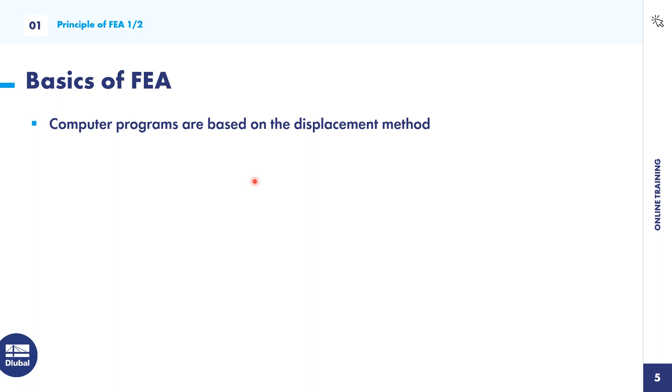But computer programs use the displacement method because it's easier to implement, more convenient, and easier for calculation in the programs. So if you look at any complex structures, it's normal that the analytical solution is not so easy.

It's hardly possible to calculate or find any analytical solution. This is also the reason why real structures are decomposed into a mesh of finite, interconnected elements. At each element continuum and at each node, the properties, especially the degrees of freedom like deformation or restraints, are described.

Normally, finite element analysis is just a numerical approximation of an exact solution, so the mechanical behavior is described by approximation sets. The whole process of decomposing a structure into finite elements is called discretization. Remember that, this is very important: discretization is the decomposition of a structure into finite elements.

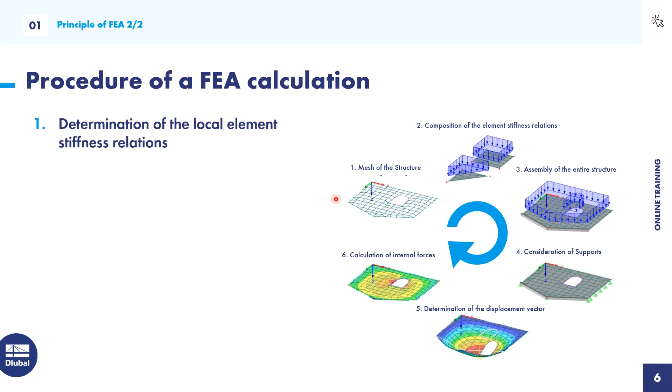So what is the general procedure of an FEA calculation? On the right side you can see this image with the basic steps. First of all, what we do is the discretization: we determine the local stiffness relations, the local element stiffness matrix at each node. So we mesh the structure, do the discretization, then transform it to the global coordinate system and assemble the entire structure.

Then we also have to consider different supports so that the structure is stable. The boundary conditions are very important to define, and normally the boundary conditions are the support conditions.

As we said before, the displacement method is implemented in the computer programs. First we determine the displacement vector, and after that the internal forces like bending moment, shear forces, normal forces, tensions, stresses, strains, and so on. This is also called the solution of the equation system, and then we determine the support forces and internal forces. So this is the general and very short concept of FEA calculation.

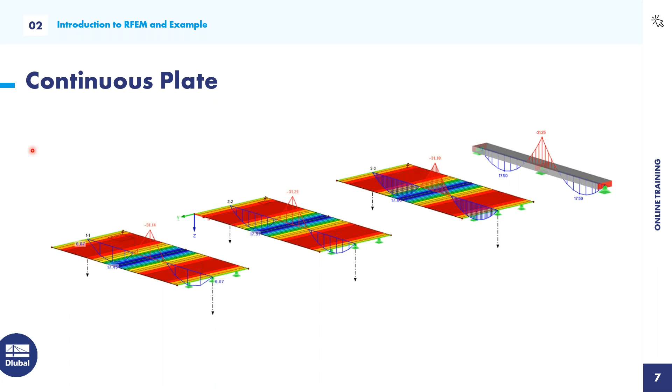I have also prepared one question for you because I want to know how good your knowledge is in using RFEM.

Okay, most of you have finished this poll, so I will show you the results. Most of you, the participants today, are beginners, perfect, and also some other guys already have some experience using RFEM, also fine, because even for them you can learn maybe some functions you haven't heard about before. So I think for everybody there's something new to learn here in RFEM. Let's go ahead.

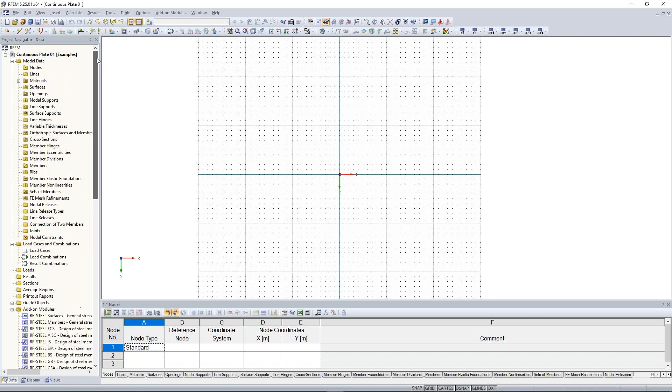I will now explain the whole user interface of RFEM. You don't have to do it with me now, because I will open another project where I can explain the whole user interface using an already existing project. Just watch and note some information. So I will open this one.

Very good. I will activate the snap and grid function here in the status bar. The chronological step is that we have the menu bar, and here we have the possibility to do almost every kind of workflow function of RFEM.

In the basic file menu, you can save, open, import, export, insert blocks, save it in the project manager, print, and so on. I think this is known from other software applications.

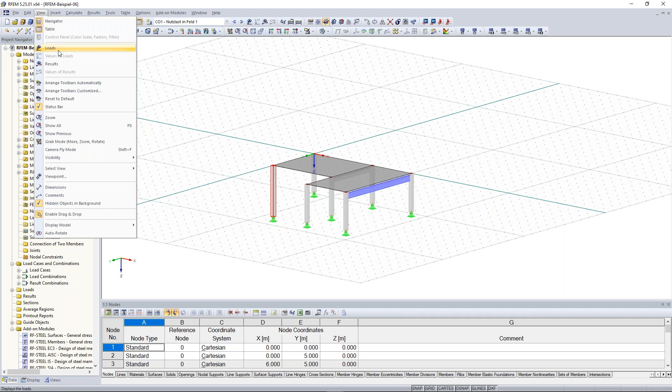Also, you find additional information concerning the model data, loads, load cases, and combinations. In the view, you can click on loads and the loads will appear.

Clicking on results, since we don't have any results at the moment, the program asks if I want to have the results, and I click yes. Now I see the results, and also some other kinds of things like comments, dimensions, and so on.

With this insert tab, you can insert almost every object, from model data to loads and also load cases and combinations.

The general step in RFEM is that at first you model all kinds of necessary objects. So you define materials, cross sections, and then you can also model members, hinges, and finally nodal supports. Then you create load cases and combinations, then loads, and then you can calculate it, and you have the possibility to watch the internal forces and results. This is the basic step in RFEM for calculating projects or doing structural analysis.

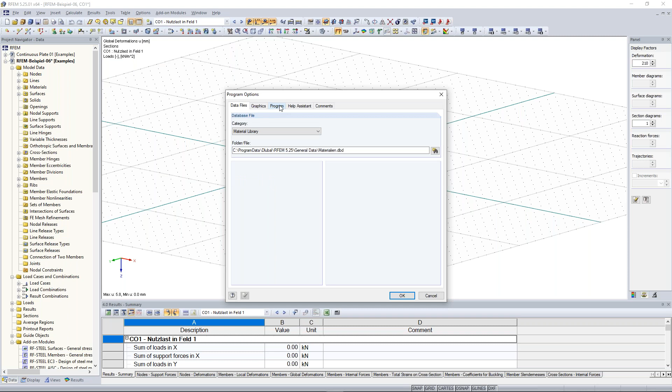The options in the menu bar let you change the language, especially for those from Italy, France, Spain, or similar countries. We have the possibility to change the language into, I think, 10 or 11 languages. The whole interface will change after you quit and reopen the program, so you restart it. Italian, Polish, French - these kinds of languages we offer. Maybe you also see in the background I use a white background here.

For those opening RFEM for the first time, you can change your background. Here in the options, in the configuration manager, you can change the background to black or white. At the moment I use the white background, but when I double click on black background, it will change to black. You can also adjust a green or red background - just use the display properties and other colors, and you can adapt your background.

Good. I think this is everything for the menu bar. Under the menu bar we find the symbol bar.

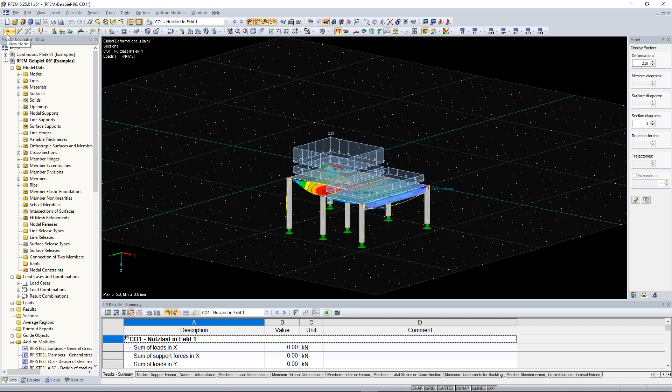The symbols enable you a fast way to insert some objects, or views, or edits, or something like that. So if I want to create a new node, I click on new node and click here somewhere, and I get new nodes and so on. The same also with lines, for example - I click here and then here. So this is, I think, pretty clear.

Now I will undo it, and I will also change my background again to a white background. Good.

Now on the left side you also find the project navigator. It is divided into four registers: data navigator, display navigator, view navigator, and also the results navigator.

So at the first one, the data navigator, you find all kinds of objects, beginning from model data, continuing to the load cases, the loads, results, and so on. You can create new objects, for example, by right-clicking on one node: edit node or new node. But of course, you can find all existing objects. So when I open this tree structure, I see the already created nodes, like this one.

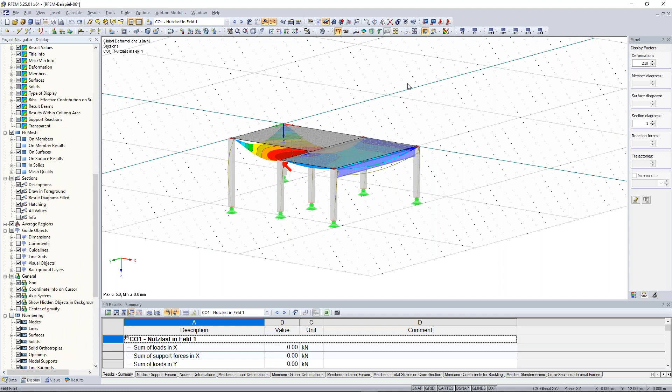You can also make some kinds of objects disappear, like the nodal supports. Just click on nodal supports and the supports disappear, but only in visibility. The same also applies to the results, FE mesh. So when I don't want to see the FE mesh at the moment, I click on that and you don't see it.

So far to the display navigator. Let's continue with the view navigator. So if you like a certain view, for example this one, quite nice, then you can create a user-defined view. Just click here on create new user-defined view, favorite.

When you rotate it a little bit, or move away from the model, and you want to have your favorite view again, just click here on favorite and it jumps back to your favorite view. This is a big advantage, especially when you are doing more detailed or complex structures or projects. Then you can use these user-defined views.

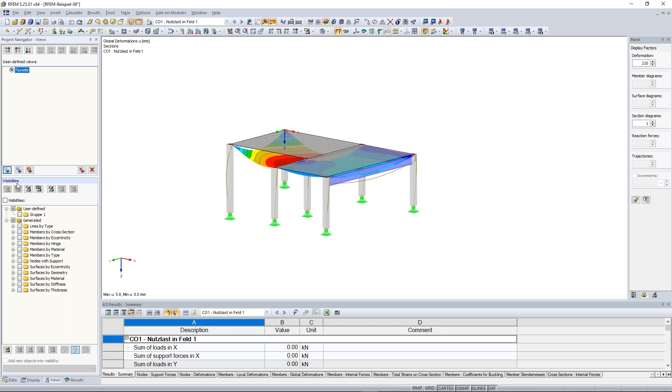Also with the help of visibilities, you can filter some things better. For example, I just want to see all cross sections of this concrete. No problem: go to members by cross section, open this tree, and activate the rectangle 300 by 300. Now only these kinds of cross sections are visible and also possible to modify.

You can also right-click, and this menu appears, and then you can click here on show hidden objects in the background, so the surfaces here will disappear and it will look like that.

To undo this visibility mode, you can click here, visibility by selected objects, click on the arrow, and then cancel visibility mode. The same thing you can also do here.

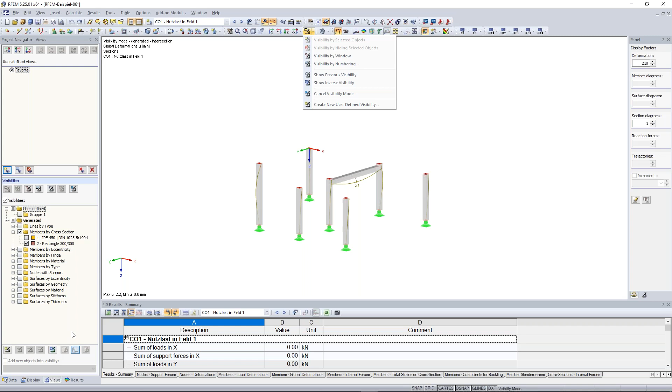Now the last navigator, this is the result navigator. Here I can see results like deformations, stresses, internal forces of members, and also the support reactions. At the moment I see the global deformation of the whole structure, also from the members and from the surfaces.

If I just want to look at the members, I click here on members and choose the right internal force. In this case, I choose the normal force, and there I can see the compression forces in the concrete columns.

Also here, internal forces of the surfaces, mx, my, and so on. And also the support reactions with the components px, py, pz, and so on.

So much for the navigator. Now, on the bottom of our user interface, we have also the tables.

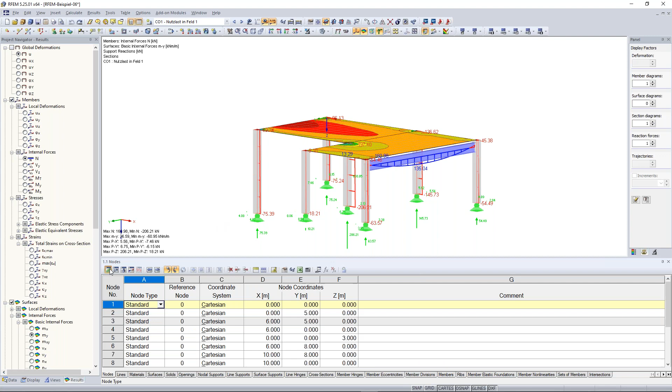With the tables, we have the possibility to view all information and also to insert and create new information or objects. For example, I can create a new node. So I click here on standard, reference node is my node here, and I enter the coordinates: x is 14, y is 0, and z is 3. And I see here this created node.

This is also possible for almost all other kinds of objects, like lines, materials, surfaces, solids, and so on. You can jump to the next tables by clicking the next icons. Now I am at the load cases, nodal loads, member loads, line loads, surface loads, results, and so on.

Now maybe to the movement of the RFEM model. With the middle mouse wheel, you can move your whole project.

By clicking the left mouse button, you can create a selection window. When you do it from the left corner to the right corner, you select everything which is completely inside this selection window. In this case, it would be the whole right column with the nodal support and also the node on the top.

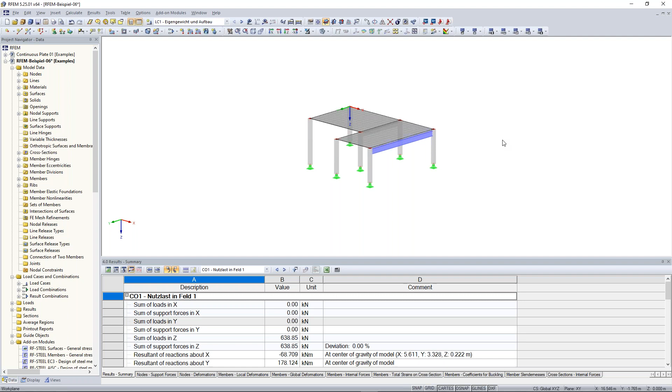With the mouse wheel, you can also zoom in and zoom out, I think this is clear. And when you press the control key on your keyboard and also press the mouse wheel, then you can rotate the structure. When you press the shift key and the mouse wheel, then you can zoom in and zoom out.

We offer these possibilities also with this icon here in the icon bar: move, zoom, rotate, and so on. There you have the same possibilities.

Good, I think this was everything. Bastian, have I forgotten something or do you want to add something? I think you haven't forgotten anything, and there are also no questions. So I think you can move on.

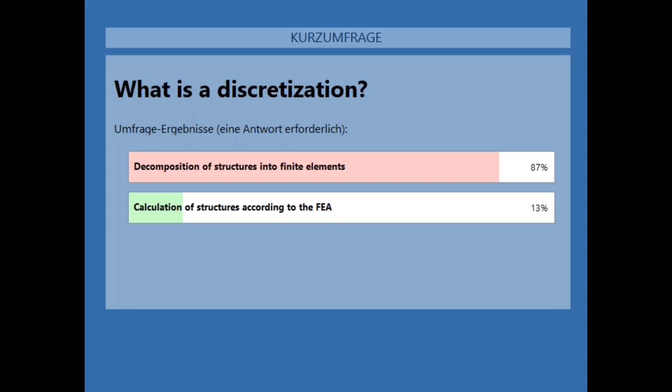Very, very good. So let's start our example. Jump back to the continuous plate. Let's start modeling it.

First of all, I create a new surface. In the symbol bar, I find this icon, new rectangular surface. By clicking on the arrow, I find also other kinds of surfaces, but for me it's good to use this rectangle one. I click on that and a new window opens.

The next thing I'm going to do is create the material. In this case, I use the Eurocode concrete C30/37 material. For those who don't have this material here, no problem - edit the material by clicking this icon here and open the material library.

There I have the possibility to filter different kinds of materials like concrete, metal, timber, and so on, and also the material category itself, like concrete and lightweight concrete, and define it according to the standard. In this case, I choose the Eurocode, because in Germany we use the Eurocode. Maybe when we have some people from Switzerland, China, Great Britain, Canada, and so on, there are also some other standards.

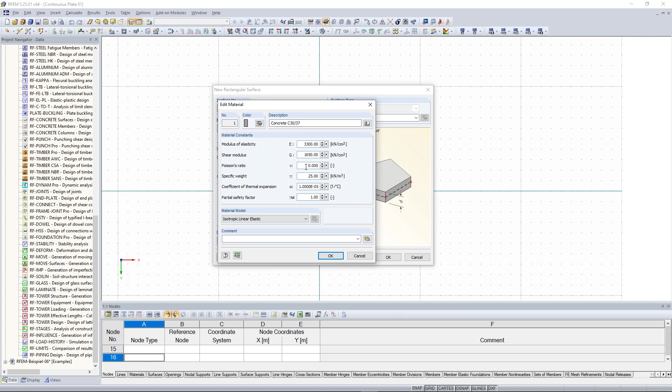for that example the results which should be constant over the whole plate thickness, so no shear deformation in the plate thickness. I click on OK. And the thickness of our concrete surface is 300 millimeters.

So I click on OK. And now I draw and activate here the snap function. Now I draw this rectangle from my local global coordinate system, 10 meters to the right side and 5 meters high.

Good, now I right click and close this way of inserting a new surface. So now I see here the rectangular surface, and now I can copy it or create a new one.

Now one tip, please remember this, it helps me a lot: by clicking the enter or return key on your keyboard, you do the same task again. So our task was the creation of this new rectangular surface. When I click the return key or enter key, it will open this new rectangular surface window again, and I click OK again, creating the same surface again with the same geometry.

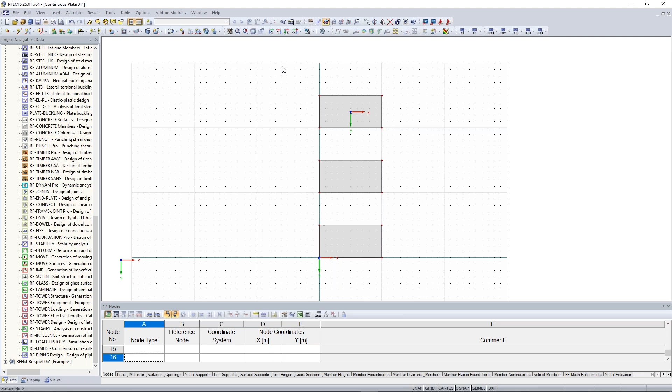And now I do it here again, in a distance of 5 meters from the right upper corner node. So now we move this 10 meters downwards. I select all 3 plates, snap here in the near of this middle surface, in the near of the left bottom corner, and move this to my global coordinate system.

Are the results better? It is useful to use the same thickness of the plate and also refer it on a 1 meter beam. So we create here a new cross section for member start, and I click here the import parametric solid cross section, a rectangle. The width of my cross section is 1000 millimeters, and the height is the same as the thickness of my plate, 300 millimeters. The material is the same, concrete C30/37.

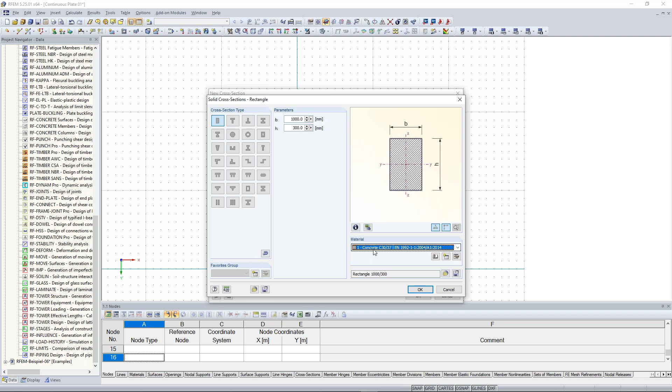I click on OK, and it looks like that. Here I get the cross-section description, also with the cross-section properties, like the moments of inertia, bending, torsion, and so on.

I click on OK. And now the member start has the cross-section of this one, and the member end also has the same. I click OK, and now I draw it from left to right, also 10 meters long, and close it with a right click.

Good. Now I can rotate it a little bit, and now I can see it from a 3D perspective.

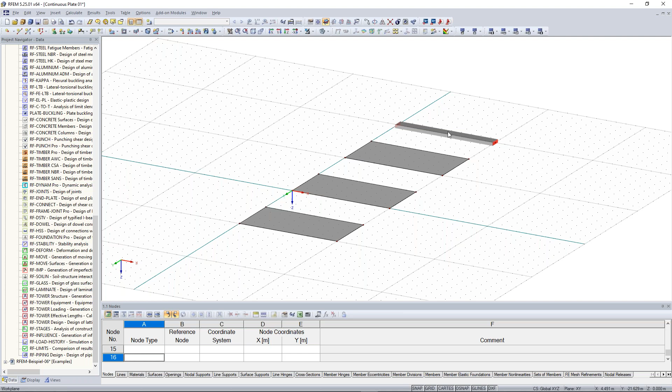So the next thing is we want to have a continuous beam and also continuous plate. Therefore, I have to create in the middle lines and also here nodes in order to create afterwards supports. So how can we do that? We can divide here this line into 2 lines, and then we get here the middle node. And then with the reference of the middle node, we can create the next line perpendicular to the other end.

So you can also see here the line, the red line, and also here the arrow. The arrow shows from the left to the right side, and this symbolizes that the starting node is on the left side and the end node on the right side.

With right click on one of the line nodes, I can also show the local axis system, and this is similar to the line direction. So the local x-axis of every line or every member is the same as in the line direction. So you see it shows to the right, to the same direction. And one important note is also that

every member has included a line, but not every line has included a member. So for this case, for example, I have here this member, and I have here included this line. So here I have this member and also the line, but not every line has a member. I think this is clear because here in this case I have this surface, and these lines are just the boundary lines for this surface.

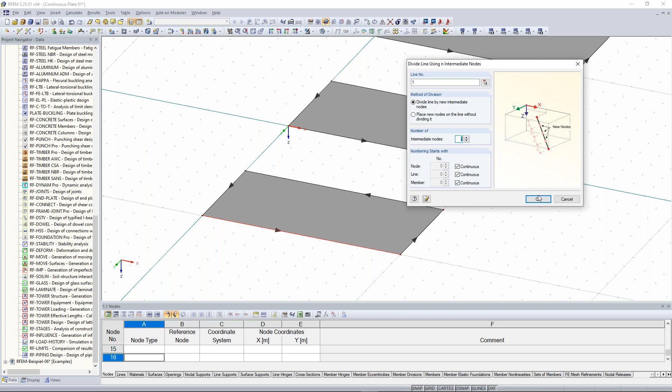And I just want to have a middle node, so I can divide it into n intermediate nodes. When I click here 1, it will be divided into 2 parts. When I enter here 2, into 3 parts, 3 into 4 parts, and so on. So I click here on 1, and I see here this node, and these 2 lines are divided.

Next thing is that we create here this line perpendicular to the next one. So click here on new line and draw this line from there to there, and double right click and we can close this.

Now it comes to my favorite way of creation of objects, and this is the copy via drag and drop. We can easily copy this line by drag and drop. Just click on that line, press the Control key on your keyboard, and now the left mouse, click and hold and put it to the other surface. And the same thing we do also for the other one.

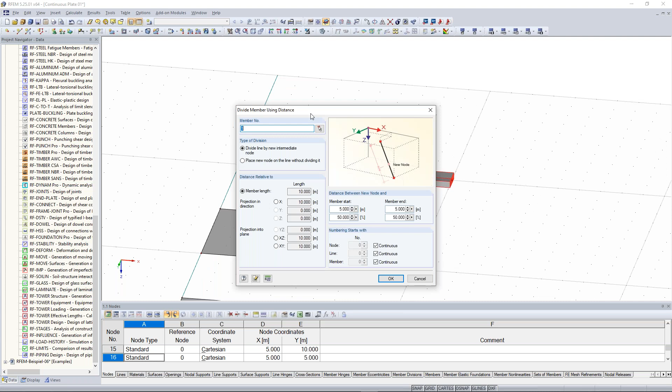Good. Now let's divide this member here. Press right click, divide member. Now you can do it by distance or graphically. I decide to do it by distance. And now it's also interesting how we can do that. We want to divide it exactly in the middle.

So we can choose here 50% as relation or the absolute value. And it will start from the member start or from the member end. And now here you can see the arrow, and this arrow shows from the left to the right side. And when I want to have a division 3 meters from the start, I have to enter here 3 meters,

and the member end will be calculated automatically. The same thing with member end. If I want to go from the right side, so from the member end, press here 6 meters, the member start will be resulted automatically. But in our case, 50%, because we want to divide it exactly in the middle. I click on OK, and we get here this new node.

Okay, Bastian, are there any questions? I see some questions in the chat. So should we show something again? What do you think?

I think what you can do is show us again how you can edit the cross section, for example, of the beam, and yeah, guess that would be nice to see again.

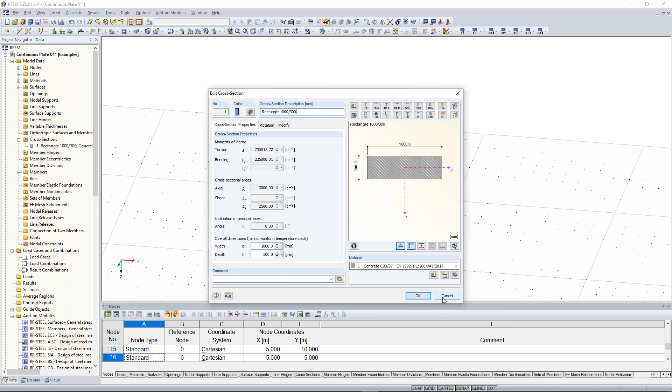This is one way of doing this. Or you choose the whole member by selecting it. Click right click, member, and edit. And then you can modify your member here also by editing the cross section for the member start, or create a new one. It's the same procedure as with the data navigator.

Good, I would continue. Now let's do some supports. It's very easy. We have line supports for surfaces and lines, and also nodal supports for this kind of members. So we create now line supports. We choose this hinged support.

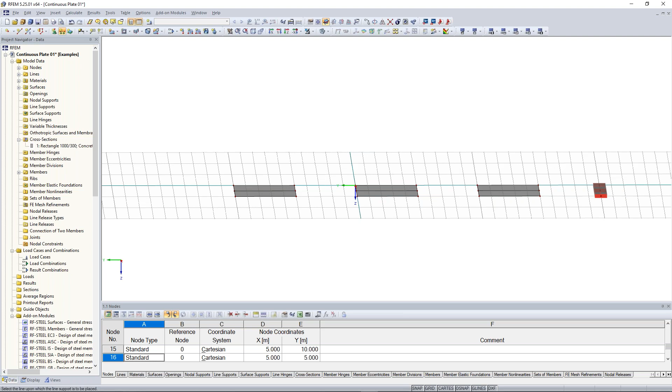I click on OK. Now I draw, and this is now the big advantage of RFEM: I can choose and select several objects at once. So I rotate my interface a little bit, and now I draw a selection window from the right to the left side in order to get all three middle lines here. And the same thing I do also with the other surfaces.

Good, now let's come to the member. Here we do two different kinds of nodal supports. The first one is a new type of nodal support, so therefore I click on new type of nodal support. And now let's look at this definition of support conditions.

So if I activate or check one condition, like UZ, then I activate the deformation of UZ, so no deformation in this direction is possible. Therefore there will be some forces. And the same also with restraints.

So the same also with, now I have to look up this word, twisting and also for moments. So in order to prevent the torsion or twisting of my member, I also have to activate the restraint phi x. This will prevent a torsion around the x-axis.

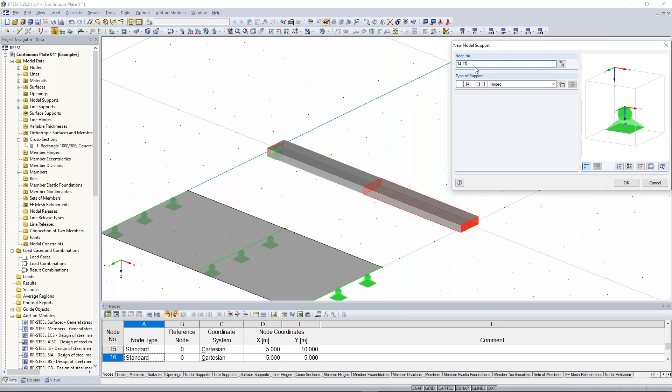So click here on New Nodal Support, and now we can choose the normal hinged support. Because we have already selected the nodes, the nodes appear here also in this box. Click on OK, and the two supports were created. Okay, good.

Now the next step is the creation of loads. Before we add some loads, we have to create load cases. Click here on New Load Case in the symbol bar. You can also do it here: load cases, combinations, new load case. Same procedure, as you can see, we have more possibilities to insert or create something. So, new load case.

And for our simple example, we insert the name or description 'test load' and deactivate the self-weight, in order to compare the results better. Then I click on OK.

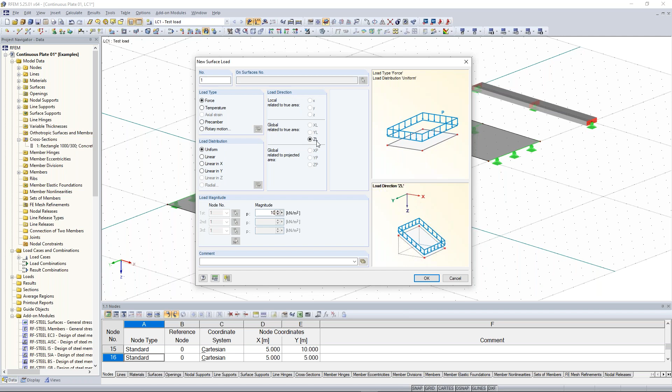And I will create here surface loads and here member loads. So again, new surface load in the symbol bar. Here I can set up some load types, load direction, uniform, so the load distribution, linear in X, linear in Y, and so on. I add here the magnitude of 10 kilonewton per square meter. Maybe the load direction is local or global, because we use the model type 2D, so there we have some restrictions concerning the load direction. I click on OK.

And I add here the loads on the surfaces. Good. And now let's do the same for the continuous member.

One big mistake, especially for RFEM beginners, is to use line loads for members. But we have to use member loads for members. Line loads are used for additional loads on lines.

So when I have, now I have to look up the word, a railing or a handrail on this line, and I want to add some loads, then I can use the line load. Or when I want to consider wind loads at lines, then I can use line loads. But when I want to really load members, I have to use the member load. Please keep that in mind.

Yeah, for members I use member loads. So I click here on member loads, enter the same load parameter, 10 kilonewton per meter. Click on OK, and I choose both members.

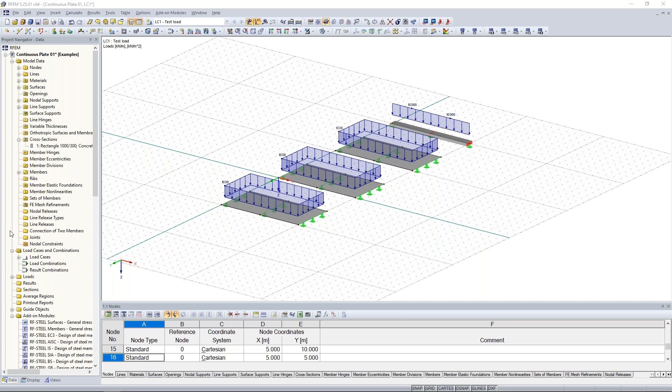Nice. So the next part is the creation of the refinement, so every surface gets a different mesh size. In order to do that, I create FE mesh refinements. Normally, the whole settings of the FE meshes are managed at the Calculate tab under FE mesh settings.

Here you set the general target length of the finite elements. If I would do nothing, every surface would get a finite element length of 0.5 meter. But in this case, I want every surface to have a different one, so I do FE mesh refinement, right click, new FE mesh refinement.

I choose surface first, target FE length 1 meter, so we get 1 meter big meshes. Now I have to choose the surface, and in this case I choose the first surface. I click OK, and OK again.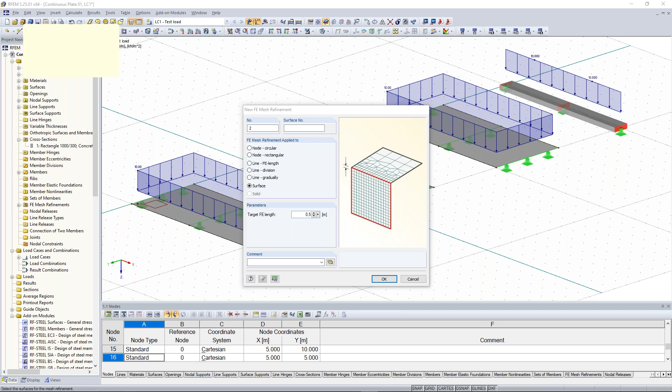Now let's do the same thing again. Right click here in the data navigator, new FE mesh refinement, 0.5 at the target FE length, and the surface is this one. I click OK, and OK again.

And now here we do a different way of insert. Right click, FE mesh refinement, new. Because we have already selected it, it shows me this third surface. We create a new FE mesh refinement, 0.1. Okay.

Here we see the FE mesh refinement with this quadratic object symbol.

And now I would suppose that we calculate it. But before we do it, in order to compare the results better to each other, it would be quite helpful if we have sections here at the surfaces. In order to do that, in the data navigator we also have the possibility to create sections.

Just right click, new section. The section name is 1-1 or something like that. You can also do A, or whatever - it's up to you.

The sectional surface, so the projection direction, is here the global z-axis. Okay, I think local and plus z is okay, but please only on surface 1. Now I have to set or choose the edge points of the section - this will be from the middle of this line to the middle of the other line. And I click OK.

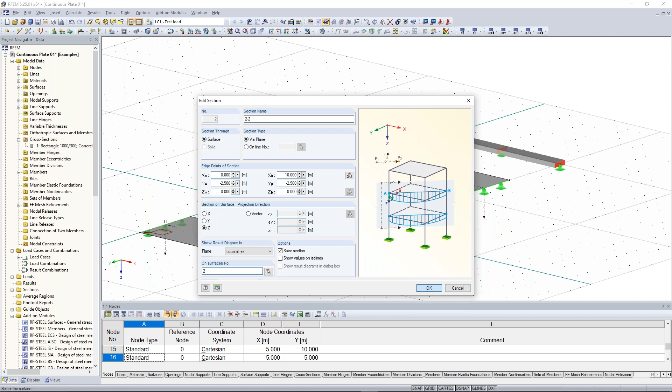So modify or edit the section name and choose the correct surface. And let's do this again - choose the correct surface and click OK.

Good, now I think we have everything. What do we need for our calculation?

The next thing is starting the calculation. Therefore you can use calculate all in the symbol bar, or also calculate RFEM results only, or just calculate, where you can choose your load case or load combinations and so on. The topic of defining load combinations will be part of the next chapters in our student series of online training. So I click here on calculate all.

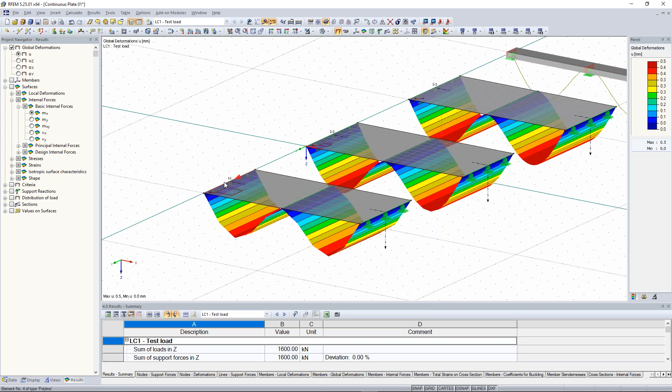And the first thing we're going to see are the deformations. So here the deformation - and also a very nice thing is when I change the display model to the wireframe display model, I see the size of the FE meshes. As we said before, in this first surface we have an FE mesh size of 1 meter, 0.5, and 0.1.

Good. In order to see the results here at the beam, we have to activate members, and we see here the bending moments. Field moment, support moment, also the shear forces and so on. But I think this is clear. More interesting are maybe the sections of the surfaces in order to see the bending moments of the surfaces.

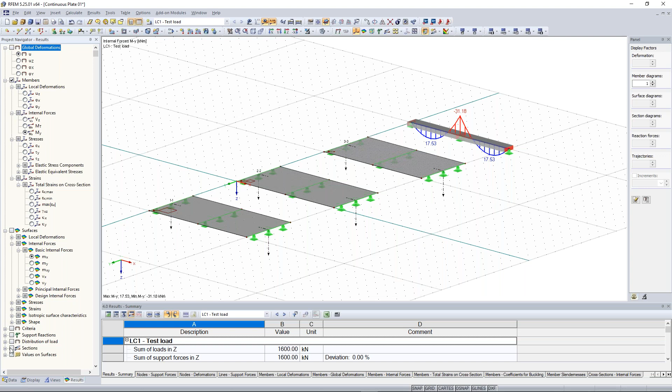Therefore, I activate here in the result navigator sections, and I want to see the bending moments. So I have to activate here surfaces and choose here MX. So one hint to the basic internal forces of these surfaces.

You can see here also the local axis of every surface, and at the moment I deactivate maybe for the moment the results. Just see what I want to explain you. Here we see the local axis of this surface, the x-axis and the y-axis. The x-axis shows to the global x-axis, and the local y-axis also to the global y-axis there.

So now, important point, the basic internal forces like mx and my, they are located in the same direction like here. So mx is along the x-axis, to the local x-axis of this surface, and the same for my.

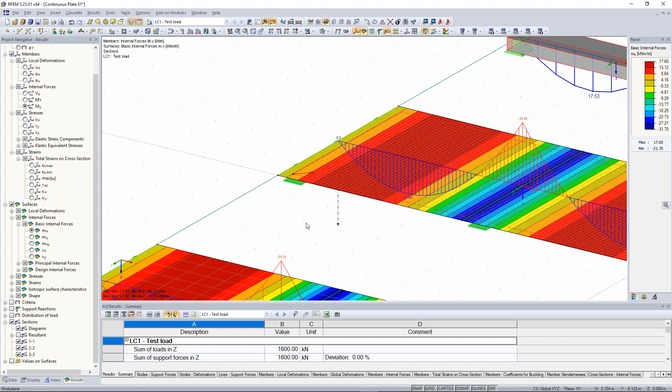But now this will be very important: the length of this FE mesh. Here you see it's linear, and normally it's everywhere linear, but here we have in 1 meter just one FE element, and here we have 10 FE elements in 1 meter. So the approximation of the results will be here very incorrect, I would say, or not really exact. And here it's more exact.

You see it here at the distribution of the moment section. And it isn't really exact in comparison to that one where we have really fine FE mesh sizes. So keep that in mind. The extreme results can be correct almost, but the results between those extreme results can be, at the more rough finite element, not so good, like in one FE element.

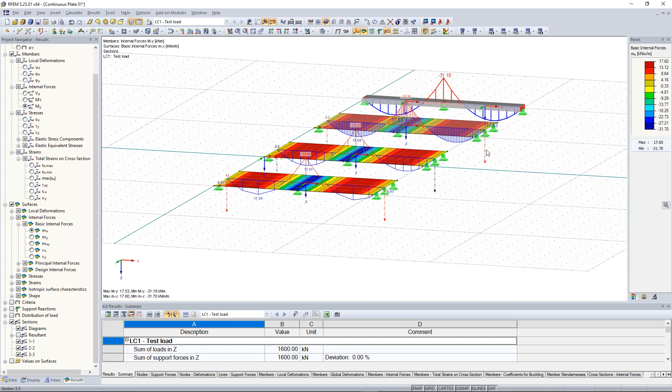I would suggest you make that FE mesh quite fine, but not too fine, because when you have too fine FE meshes, then the calculation will take very long. So you have to find the right proportion, the right FE mesh sizes, in order to have correct and exact values, but also consider the long calculation of FE programs.

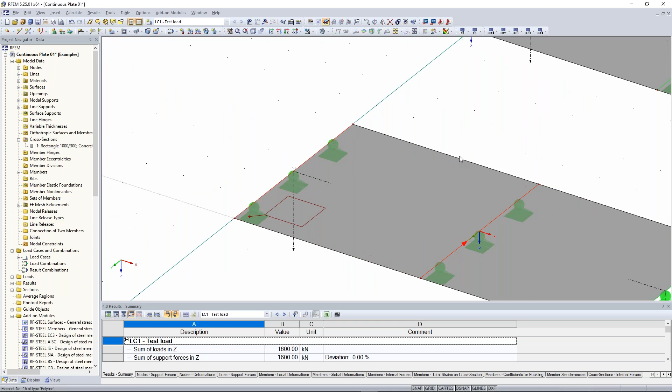Now I see one question, and this question is, what is suggested FE mesh size? I would recommend you to have at least 4 up to 6 or 8 FE meshes in one surface. So we have here from there to there, it's 5 meters. So at least there should be from one boundary condition to the other boundary condition at least 5 up to 6 meshes, finite elements. So I would say this one is quite good.

This with the mesh size 0.1 meters, this one is very fine, and it is not so important to have so fine FE mesh.

And another question I see: are there any shortcuts for show or hide loads? No, unfortunately not, there are no shortcuts for that kind of things. But maybe Bastian, you could find other shortcuts for other type of functions. This would be good if you could post it as an answer for that question. Okay.

Good. Now, normally in the study, you do some hand calculations. That's pretty common, and therefore you also use tables or calculators and so on.

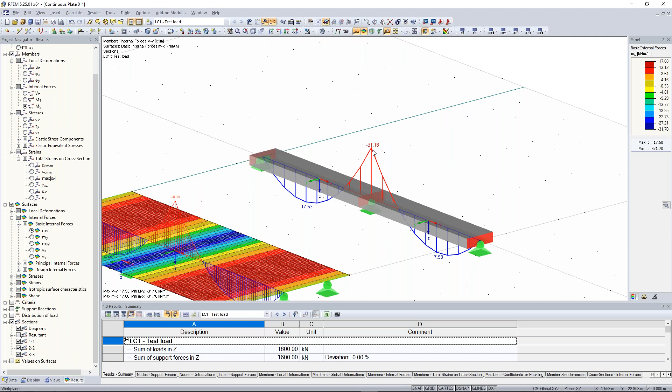And when you calculate the support moment of a two-field beam or continuous beam, you will get maybe other kind of values. So let's watch the results again. Normally you would get here a support moment of 31.25 kilonewton meters. Yeah, but in this case, just 31.18.

Why? It's due to the shear activation of members. So I go here to calculation parameters, and here you see the activation of shear stiffness of members. If I activate it, it considers additional shear forces and therefore also additional deformation, and you calculate it as not as stiff. In Germany, you would say schubweich. So with the activation of these cross-sectional areas AY and AZ, additional areas of cross-section.

So this will be very interesting for the next chapter now, because I have also prepared a PowerPoint for that. So I jump back to my PowerPoint.

Now I want to take a look on the plate theory. First of all, we try to take a relevance to the beam element. On the one side we have the Bernoulli beam, and on the other side the Timoshenko beam. The Bernoulli beam says the cross-section remains in plane, and also remains perpendicular to the member axis. We don't consider any shear deformation, so we have really rigid shear stiffness. When you calculate something in the study with tables, you calculate a Bernoulli beam.

But what is most commonly implemented in FEA programs is the Timoshenko beam, or also the other plate theory. But first we take a look at the Timoshenko beam. The first condition is the same: the cross-section remains in plane and remains perpendicular to the member axis. But here we consider shear deformations, so the shear stiffness is limited and not rigid anymore.

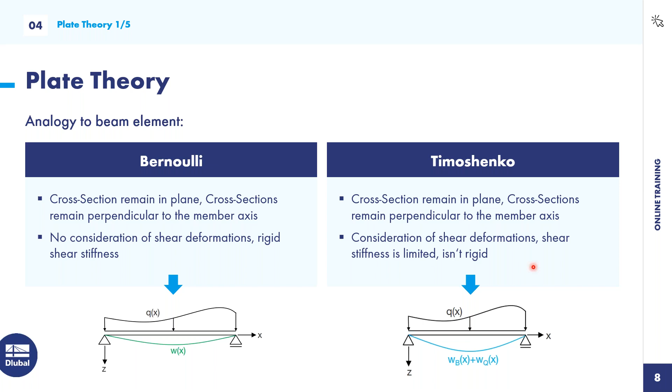Here it remains perpendicular to that axis, and here we get an additional angle, so it won't be perpendicular anymore to the member axis. So additional deformation according to this Timoshenko theory.

Now let's transfer the beam theory to the plate theory. The Bernoulli beam is in the plate theory the Kirchhoff theory, and the Timoshenko the Reissner-Mindlin theory. So what are the conditions? We have a geometrical linear system, small deformation, also Hooke's law, cross-section remains flat, no warping, and a constant thickness, and we don't consider any shear deformations.

Reisner-Mindlin: the four conditions are the same, but we consider shear deformations and also the transverse and lateral strain. What is that last one? When I have this kind of beam and I try to pull it with a force, it will get a little bit longer - that part is called delta L. And also the cross-section becomes a little bit smaller. This effect is called the transverse or lateral strain. In German, we would say Querdehnungseffekt.

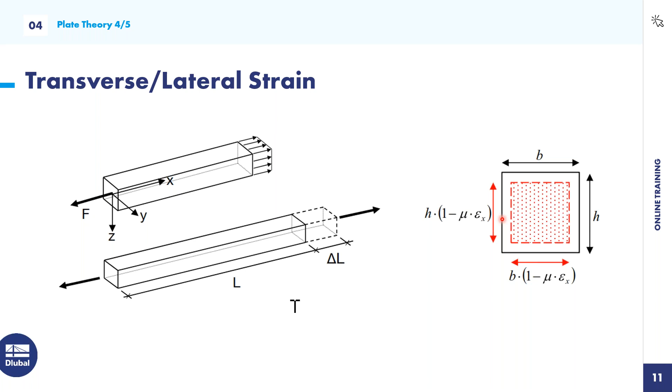So again, as a summary, Kirchhoff on the left side, Reisner-Mindlin on the right side. Kirchhoff is the same as Bernoulli, and Reisner-Mindlin the same as the Timoshenko beam. At Kirchhoff we don't consider any kind of shear deformations, and at Reisner-Mindlin we consider shear deformations.

So what can we use Kirchhoff for? We can use Kirchhoff for the theory of thin plates - normal concrete surfaces, like in story buildings or something like that. There we can get quite good results with the Kirchhoff theory. It's a simplified approach. And the Reisner-Mindlin theory, since we consider shear deformation, we can use it for thick plates as well as thin plates. When you calculate according to Reisner-Mindlin, you get, for both thin and thick plates, quite good results.

Because it's a higher value approach, and we also get more accurate shear forces. So my recommendation for you is please use Reisner-Mindlin, because then you get quite good results for almost every kind of application area. When you use Kirchhoff for very thick plates, like plates with a thickness of 2 or 3 meters, like foundations or something like that, the results won't be so correct.

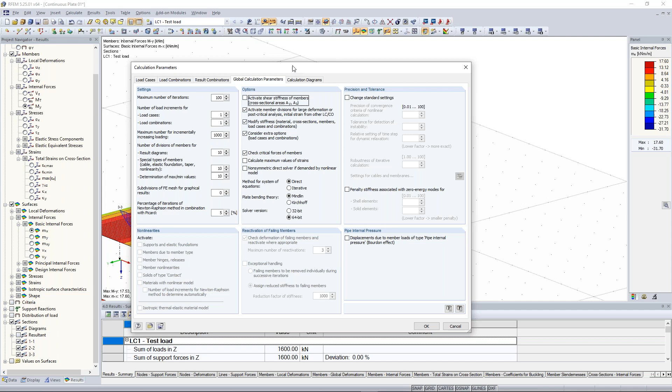Good. Now let's jump back to RFEM, and let's see what happens when I change here at the calculation parameters the activation of the shear stiffness of members. So I deactivate it - now I calculate according to the Bernoulli beam, so no shear deformation.

I recalculate it, and I will get the support moment of my two-field beam of 31.25. This will also be the same when I calculate it according to tables, or when I do this by the force method or by hand. So keep that in mind.

Okay Bastian, are there any questions? I don't think you missed something. We have no unanswered questions. So, well, feel free to ask. Oh wait, there's a new one. But I think it's better if I answer this on my own, because this doesn't have that much to do with the online training right now.

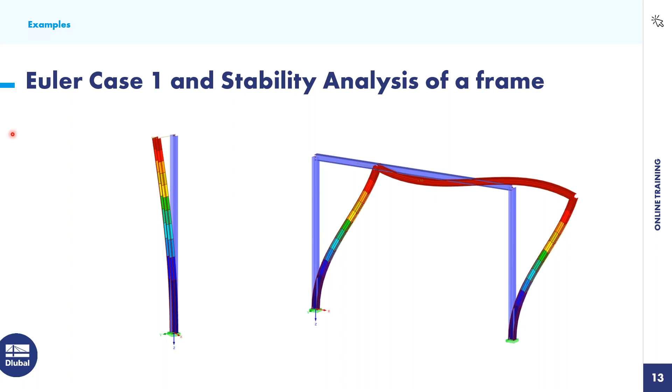Okay, let's go ahead. I create a new file, a new model here in RFEM. In this case, I insert here Euler case 01, save it under downloads. Very important now, I want to consider a 3D model, because we do a stability analysis of this Euler beam, and there I want to consider both buckling directions, so therefore 3D. I click on OK.

What we gonna do now is creating this column. Therefore, click here on new single member. Click on create new cross section for member start. And we choose here a steel profile, what is very common in Germany.

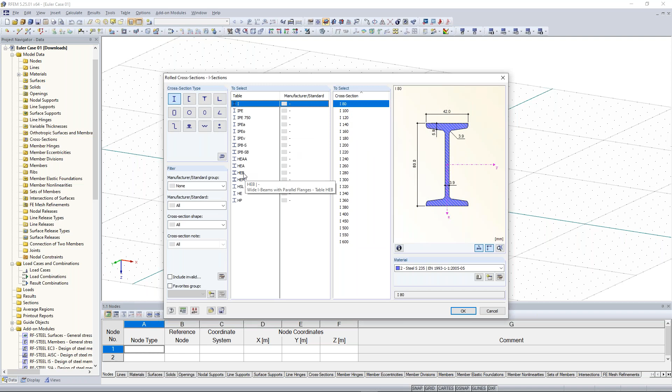HEB 300. So I click here on import roll cross section HEB, or if I can't find it here, you can also import cross section from the library. Click here on I sections, and choose here this HEB. So what are HEBs? These are wide I-beams with parallel flanges.

And we choose here this HEB 300. Material is steel S235. We can also edit this material. I choose here this steel material according to the Eurocode. You can also import some material from the material library. Steel S235 because of this yield strength of 23.5 kilonewton per square centimeter. I click on OK.

Again, and now I want to create this column, and this is also maybe one of the mistakes - when I want to create a column and I'm not in the correct work plane, I can't model it into the height. Yeah, it doesn't work because I am here in this work plane. Two possibilities: I change the work plane, for example in XZ, and then I draw it 10 meters high. Or if I want to stay in the same work plane like before in the XY, I have also the possibility...

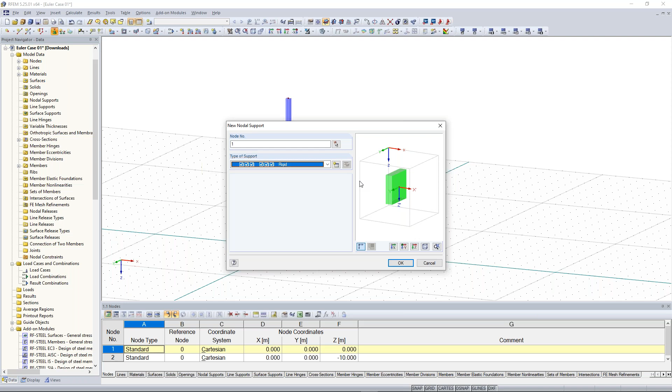This is one tip. I delete the right column, and now I will add here this support, nodal support. In this case, we have here rigid support, so the whole node is fixed in every direction. So there will be horizontal and vertical forces and also bending moments around all axes that can be transferred into this nodal support.

Good, now this was everything concerning the creation of modeling. Now we create a new load case again - load case will be test load. And we don't consider the self-weight again. I click on OK.

Now we create a new nodal force, on that node here. Therefore, we click here on new nodal load - you find it here at the symbol bar, new nodal load. This nodal load refers to the global coordinate system. I put here a horizontal force in the global X direction of 10 kilonewton and vertical force 100 kilonewton. I click on OK and press or select the head node here. Good.

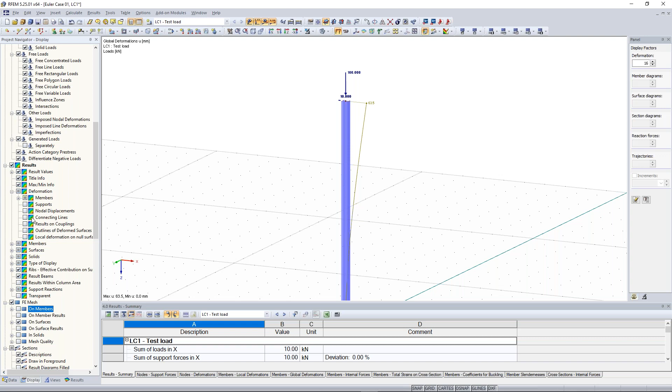Therefore, we go to the display navigator, scroll to the chapter results, and jump to the chapter deformation, members, and I want that the cross sections are colored. So I click here and we see the cross section colored, also the deformation of the member. Okay, I think the deformation is pretty clear. We have here this horizontal deformation, mainly, maybe also a little bit pressed. Okay, good.

Now, also interesting is the calculation theories. Maybe the calculation according to the first theory of order, then also the second theory of order, and so on, all the p-delta. When I do the calculation of load cases, I build the equilibrium of the system at an undeformed system. The second theory of order calculates the equilibrium at a deformed system, and there can be some differences, especially when talking about internal forces like the bending moment. Therefore, I want to show you the differences.

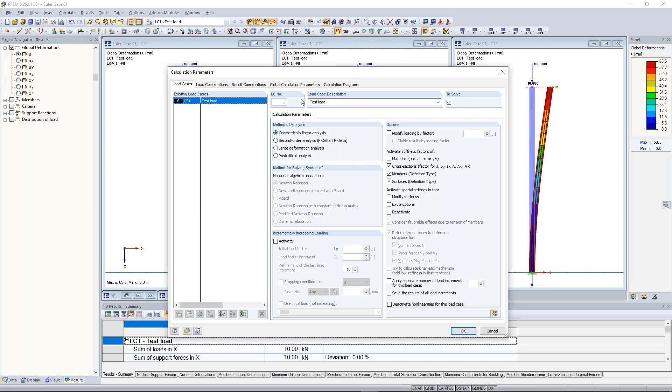So what we're gonna do now is go to Calculate in the menu bar, and go to the calculation parameters. Go to the register load cases, and there we have our load case test load. Normally the load cases in RFEM are preset with theory of first order, so we have a geometrically linear analysis. Now we're gonna do a nonlinear geometrical analysis, so we choose the second order analysis, p-delta. I think especially the American guys know this as p-delta. I click here on second order and calculate it. So let's calculate it.

And maybe you see also here the deformation. They are a little bit different, but this is not the main point. I take a look at the bending moment, especially at the bottom. There we have 106.87 kilonewton meters. Normally, we have a length of 10 meters, a horizontal force of 10 kilonewton, 10 multiplied by the lever arm of 10 meters

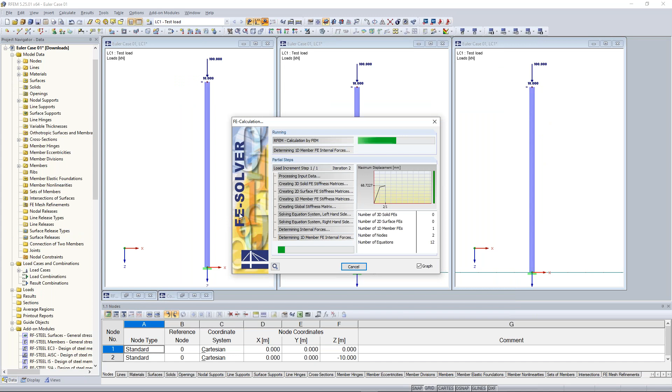is 100 kilonewton meters at the bottom as the internal bending moment. So you don't have to do it again, I will show you the internal forces again at the analysis of a geometrical linear analysis, so theory first order. Here 100 kilonewton meters. Now again with theory second order, and now we get an additional 6 kilonewton meters.

Yeah, where does it come from? As I said, the geometrical nonlinear analysis, according to the theory of second order, is the calculation of the equilibrium at the deformed system. Now let's take a look at the deformed system. The horizontal deformation here at the head node is 68.7 millimeters. Now when you multiply it with the vertical force of 100 kilonewton, you will get an additional bending moment of 6.87 kilonewton meters, resulting in an overall bending moment of 106.87 kilonewton meters.

So 10 kilonewton multiplied by the lever arm of 10 meters is 100, plus the additional moment due to the deformed system. 100 times 68.7 millimeters equals 6.87, and as a sum we get here 106.87 kilonewton meters. So far to the different calculation methods.

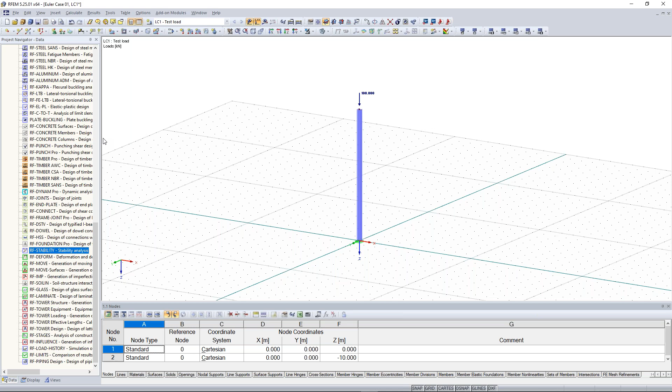Good, now let's come to the stability analysis. This is also very important, especially when you are dealing with steel structures. There you will need it. So first of all, I will create only a vertical force, so I will delete this horizontal component. I will show the grid again. For stability analysis, in order to get the buckling or the eigenforms or the critical load factors or the critical loads, critical lengths, you have to use one of our add-on modules, and this is RF-STABILITY. You find RF-STABILITY here in the Data navigator, scroll down, here you will find it, RF-STABILITY. Or you find this also here in the menu bar, add-on modules, stability, RF-STABILITY. So this new window will open.

And what you can do with RF-STABILITY: with RF-STABILITY, you can do any stability analysis by the eigenvalue method. So you can calculate eigenforms, buckling forms. You can get the critical lengths, critical forces, critical loads, and so on. And this is very good in order to detect maybe some weaknesses of your structure, or to detect some critical points and so on.

Therefore, it's very good. Now let's do the typical Euler case number 1. In the study, I think you have already learned how the first eigenform or the critical buckling of one Euler case looks like. Let's do the same here in RF-STABILITY. First of all, number of lowest eigenvalues: in this case, the Euler case 1, there are only 2 cases important, so I choose 2. We have the buckling around the weak axis and the buckling around the strong axis. We choose here load case 1. We don't need to consider favorable effects due to tension, and also no prestress for cable and membranes. But I would activate the division of straight members and set the minimum number of member divisions to 10.

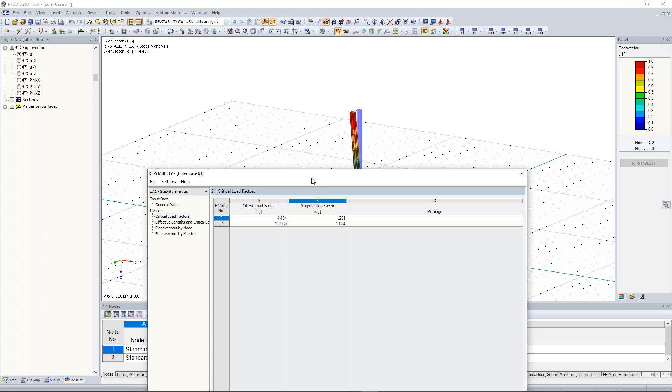So let's watch the eigenforms graphics. The first eigenform of this column is the buckling around the weak axis, you can see it here. The weak axis is the z-axis, so around the weak z-axis my system is buckling - this is the first eigenform. Now the next eigenform is around the y-axis, because the y-axis is the much stronger axis. I think this is pretty clear. And therefore, because the strong y-axis can resist more loads, the critical load factor is higher, and also the critical load is higher.

Good, now let's see what happens when I increase the load from 100 kilonewton to 443, still under my critical load. Let's calculate this - calculate all, because when I have an add-on module open, I have to click calculate all, in order to get results from every load case and every add-on module.

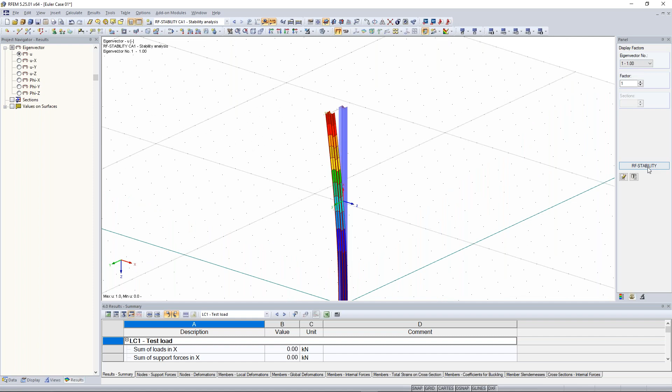Good, okay, RF Stability - now we can see it. The critical load factor is exactly 1. This means that the system, with that load of 443 kilonewton, is almost unstable. Now let's see what happens when I increase the load to more than 443, to 444.

Now we get the result, and then a calculation error: the stiffness matrix is singular, the model is unstable. And this is the reason - the model is unstable because of that too high load. So in this case, my system is unstable, the stiffness matrix is singular.

For that, we have a very good FAQ. Bastian, maybe you could put the FAQ in the chat, and this FAQ will help you find the problems or the critical locations of why your model is unstable, especially at the beginning of modeling with RFEM. It's possible that you'll find these problems.

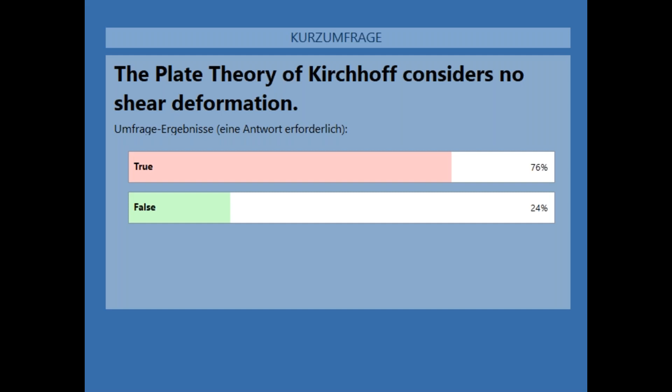So the correct answer is the first one: the plate theory of Kirchhoff considers no shear deformation. So that's correct. And now I have also prepared another question concerning the critical load factor.

Okay, let's close this poll again. I show you the correct answer, and most of you have chosen the correct answer. So again, the critical load factor says with which I have to multiply the load the critical load factor in order to get this system unstable, or until the structural system fails. Good.

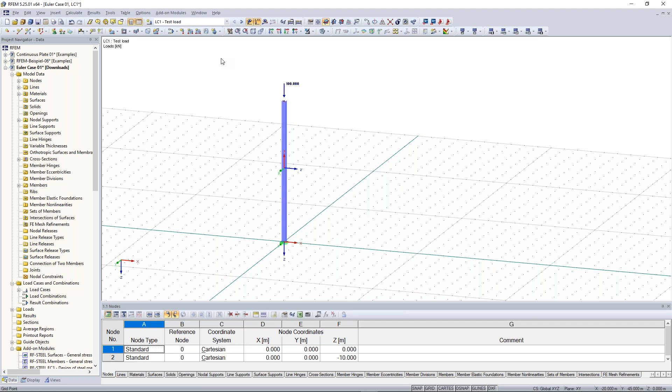A big advantage now in RFEM is that we can easily copy something. Therefore, I select the whole column, right click, and say move and copy. It's important when I want to copy something that I put here a number higher than 0. The displacement vector is 10 meters. I can put here 10 meters as a number, or I can select 2 points in order to get the displacement vector. In this case, I choose this length and this length. It's the same.

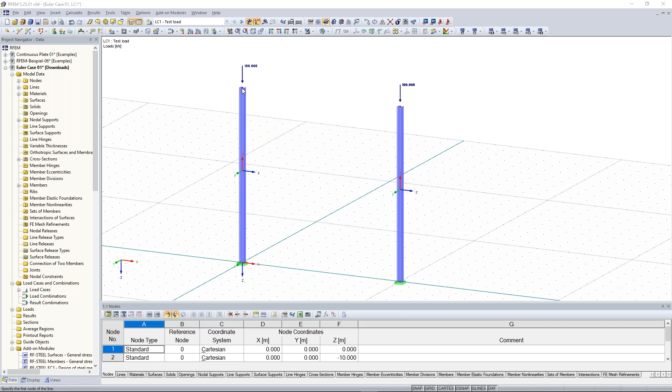Good. Now I need a girder for the frame, and therefore I create a new cross section. In this case, also a new single member. I click here in the symbol bar, new single member, and create a new cross section for the member start. I choose the IPE 300 profile. I can also enter this in the cross section description. Material remains steel. Click OK and draw it from the left column to the right column.

Okay, good. Now I want to change the height of this frame. Therefore, I select both nodes, right click on the member - doesn't matter, member or nodes - and then I can choose the nodes and say okay, I want to edit it.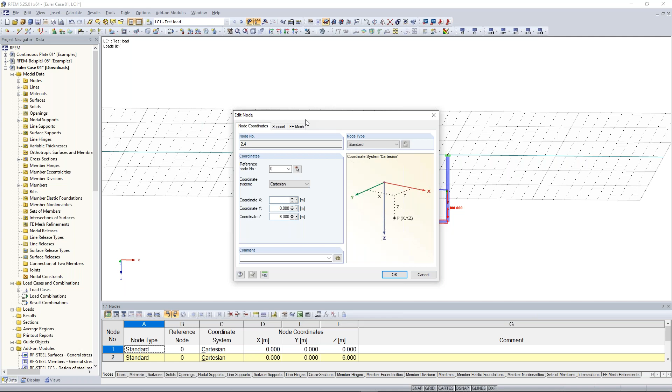Because they have the same coordinates, I can modify the Z axis, the Z coordinate, and choose -6. So what was the mistake? The mistake was that I also deleted the minus, and now the system was oriented according to the global z-axis, and my global z-axis is located downwards. Therefore the coordinate z plus 6 goes in this direction, but I want it like that, -6. No problem, you can change it afterwards very easily.

Good. Now the same thing again, let's do the stability analysis. Therefore, click here on RF Stability again. And now we show a few more eigenvalues, 6 for example. Calculate it.

And now let's watch the eigenvectors. We can see that we have a deformation out of the plane. Normally this isn't so good for frame structures or for steel halls, and we try to prevent these situations. Jump to the next eigenvector - here the same, we have deformation out of the plane, so the eigenform shows out of plane globally, the whole system.

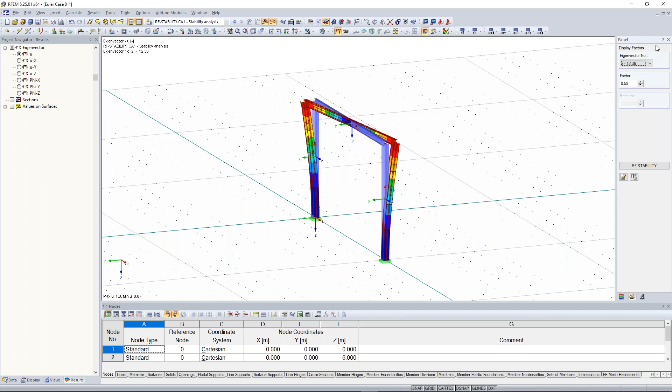The third eigenvector is that eigenform that we know maybe also when we have eigenforms in plane. And maybe also watch the other one - this is also out of the plane. How can we prevent this failure out of the plane?

There are two possibilities. When I want to calculate it just in 2D, I can assure that buckling out of the plane isn't possible. Then I just change here at the general data, right click, general data, the type of model to 2D, XZ. Let's do it. Calculate RF Stability again. And now let's watch the first eigenvalue, and this is this one. When I switch to the other ones, only in the plane, and so on.

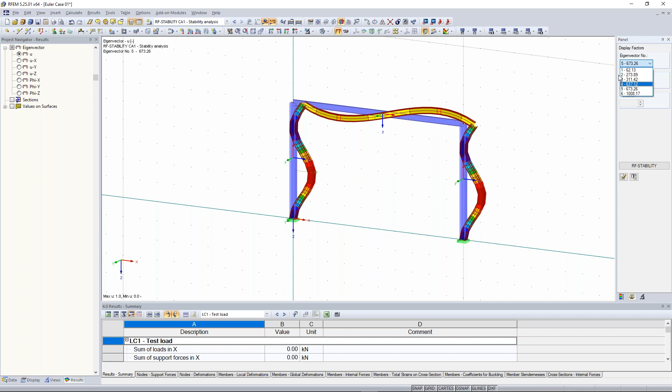So, but how can I prevent this when I have a 3D model? Because normally structures are in 3D. So, general data, 3D again. I can add additional supports who carry loads from the global y direction.

I select here the upper nodes, create a new nodal support, and now I want this nodal support to carry only forces in the global y direction. Therefore, create a new type of nodal support. I activate the deformation in this direction, and in this case it's UY. I click on OK, and let's see what's going to happen if we have the same cases.

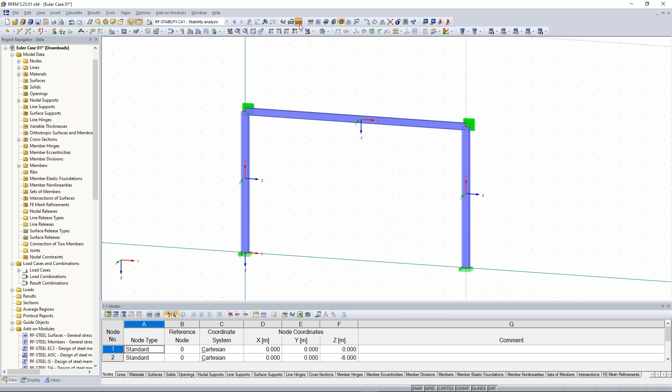Again, the first eigenvalue is here, this one. Next one is this one. This is out of the plane, but only the column, not the upper girder here. This is important to know. This is more a local failure. This is a global failure. This is important to know.

I have forgotten one thing, honestly. I'm sorry about that. When you take a look at the effective lengths, you can use them also for stability analysis, for this steel design, for example. And when you calculate this with your hand calculation and compare the results, it can be possible that your effective length calculated by hand and the result by this program can differentiate. This is because of the activation of the shear stiffnesses. So let's take a look at the results maybe.

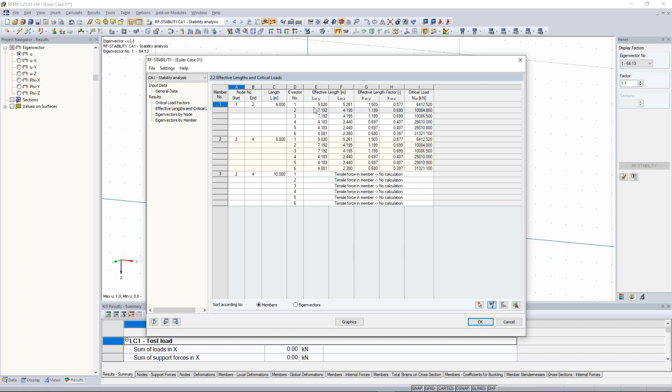Effective length. Remember just here, this one, effective length, 9 meters, okay, 9.020. When we change here the calculation parameters and deactivate the shear stiffness and calculate this again, and take a look at the results, we see here different effective lengths. This is due to the shear stiffness. Keep that in mind when you want to compare your hand calculation with the results of the program.

So what does this mean? Effective length, L critical Y. First of all, effective length factor 1.5. So you have to multiply your member length with the effective length factor in order to get the effective length. So when you calculate 6 meters times 1.5, then you will get 9 meters, and 9 meters is this. Sorry, nine meters is this member length here. So you have to imagine that this is the member length here, something like that.

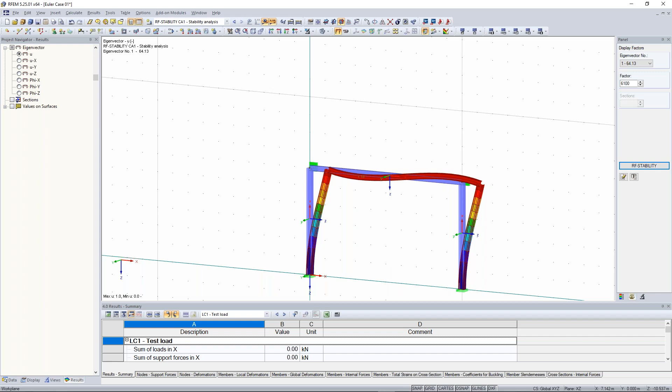I think this was everything. Bastian, are there any questions, or should I show something again? There's no specific question, but maybe you want to show us how you can create a joint in the beam, or a joint connection between the column and the beam. In general, when you use the beam type, every member has a member type, and this is the member type beam.

This means that every member is connected to the other one rigidly. So no hinges, stiff connections and stiff joints. When you want to add some hinges, like member hinge or also kind of springs, you can add here member hinge. Let's do that. So we suppose for the upper girder here at both ends hinge. Hinge tells me that we don't want to transfer any bending moments to the other part, just shear and normal forces. So therefore I have to activate here phi Y and phi Z. And the same also here for the member end, because every member and every line have one starting node and one ending node, and also the member direction.

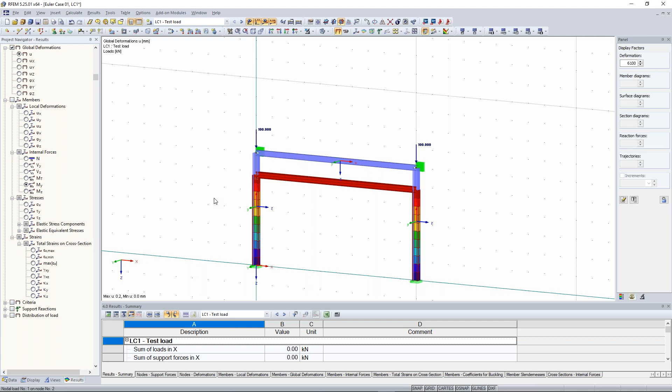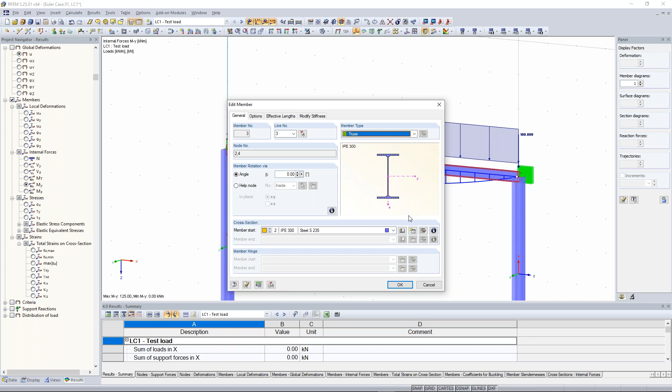You see here the deformation. I think that's pretty clear. And also the bending moment. At both ends I have no bending moments. And the same thing, when I have one beam which has on both ends member hinges, then instead of this beam with these member hinges, I can create another member type. I can create here this truss member type. We also offer other kinds of member types, but we come to those in other parts of the training. So I choose here truss. Truss means that I have on both ends also hinges. I click on OK. Remember the 125 kilonewton meters.

I click on calculate. And you will get the same result. Bastian, any other question? No, you just solved the last question by using this truss member type. So no more questions. Okay.

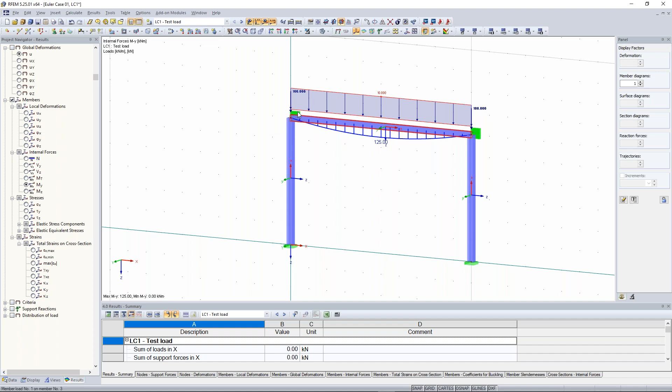I'm sorry for that, but what I wanted to ask is, let me show it to you here at RFEM. When I want to have a support node which has only horizontal forces, I have to activate here Px, so Px and Ux, these two. I'm sorry for that bad formulation of the question. But when I have something like this, then horizontal forces in X and Y direction are considered. Okay, good.

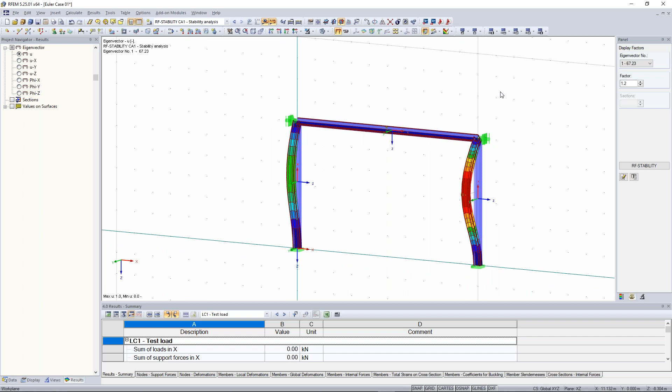Why do we need Vz for beam hinge in the previous example? First of all, the calculation of truss stability is almost the same, no differences, and so on, you can calculate this as well.

Now let's jump to the continuous plate. There was one question, why we need Vz for beam hinge in the previous example. I think you mean this one, so this nodal support. Oh come on, this one I can tell you why.

Because when we calculate this like that, the beam would rotate over its own axis, so this would cause an instability. I can show it to you, and therefore we have to close this directional deformation. Otherwise, it won't be possible to calculate it.

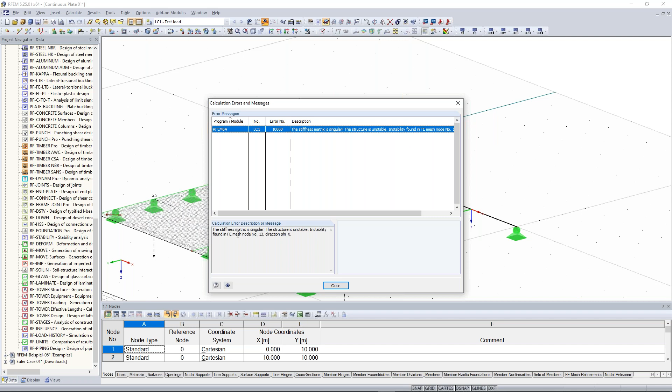Stiffness matrix is singular, instability found. Structure is unstable, instability found in the FE mesh node of the direction phi x. Therefore, we have to close this possibility of movement. And then it works.

So now the other question, can you model a two-way slab in 3D and compare it to hand calculation? We will do this in the other parts of the training. And yes, today's training or webinar was free for students. Exactly.

So Bastian, anything to add? Or do you have something? You were too fast. Sorry, Bastian. No, but I would say that we have everything. Do you? What do you think?